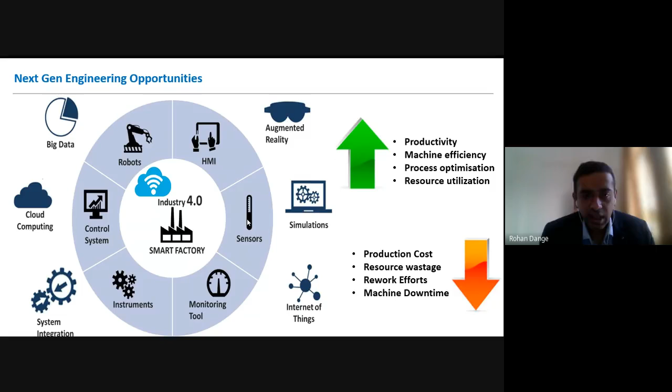Coming from the automotive background, or presently working in the automotive space, these are the key areas where we are seeing a lot of demand coming from research and development institutions, technology companies, OEMs, and other support tier ones, tier twos, and engineering companies. I'll do a deep dive in the subsequent slides, but at a high level, this includes vision-based terrain mapping systems and intelligent systems.

Telematics is nothing but connected car kind of solutions, digital simulations and research. So if you had to check the safety of a vehicle, no more do you require a physical vehicle to do all this testing. Everything has now shifted to digital simulations and research.

Big data and machine learning: a lot of data is being generated by vehicles now, and analysis of that big data would help in predictive maintenance. It's not that your machine would have a downtime and then you understand the fault. The intelligent systems would tell you in advance that in the next 50 or 60 kilometers there is a probability of some fault occurring in your car. That's how the systems have become very intelligent.

System engineering, system integration, validation, human machine interface, and electrification. Electric vehicles are going to be a big topic post-2025, and every country is now targeting shifting from fossil fuel powered vehicles to complete electrification. So electrification of vehicles is one of the upcoming areas in today's automotive world. If I had to bucket all these things into major trends, I'll say it's electrification, connectivity, and autonomous operation.

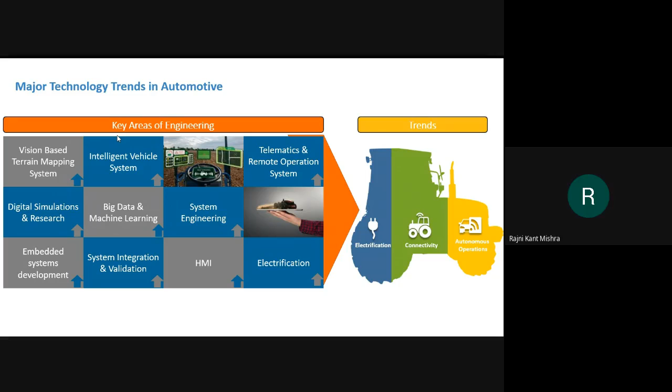If I talk of electric vehicles, it's a vast ocean, I'll say. But if we bucketize the major offerings from the electric vehicle domain, that would be the battery management system, which is the heart of any electric vehicle, charge control modules, supervisory control unit, electrical vehicle control module, motor control unit, DC to DC converters, onboard chargers, and range extenders.

So just to give a high level overview, range extenders are nothing but, if your vehicle is capable to run 300 kilometers on a single charge, every OEM is doing R&D on how to extend that range, say from 300 kilometers to 400 kilometers on a single charge. Onboard chargers.

Onboard chargers are nothing but, when the vehicle battery is down, how we are able to quickly charge the electrical system so that the vehicle is up and running.

DC to DC converters, because every subsystem device would run at different voltage in an electric vehicle. So those DC to DC converters would be required so as to suffice the need of each subsystem device for their voltage requirement.

Motor control unit. Electric vehicles, as you know, are completely motor driven units. So controlling that motor, acceleration, braking, all those functions are driven from the motor control unit. And this electrical vehicle control, supervisory control, charge control are nothing but the control systems which govern electric vehicles. These are the 6-7 major areas where engineers would be required for the design, development, validation of electric vehicles.

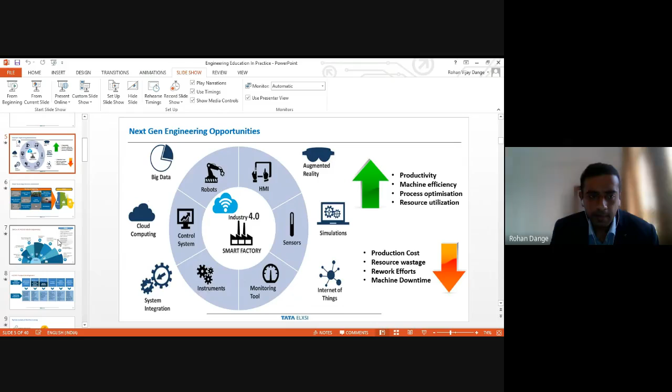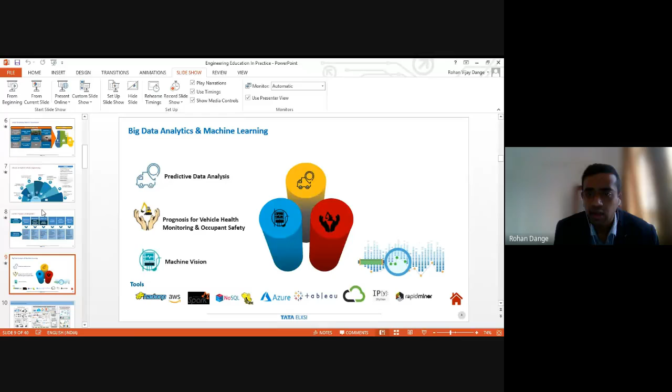Then we talked about the major technology trends in the automotive sector, then electric vehicles. We did a deep dive into what is meant by product development management. Then subsequently I talked about big data analytics and machine learning, and gave the use case of chiller application in Amul Dairy plant.

Then we touched upon the data analytics platform, right from how the data is collected to how the dashboards are used to interpret the data and take corrective action. We talked about smartphone applications, and how with technologies like Alexa, our homes are becoming smart.

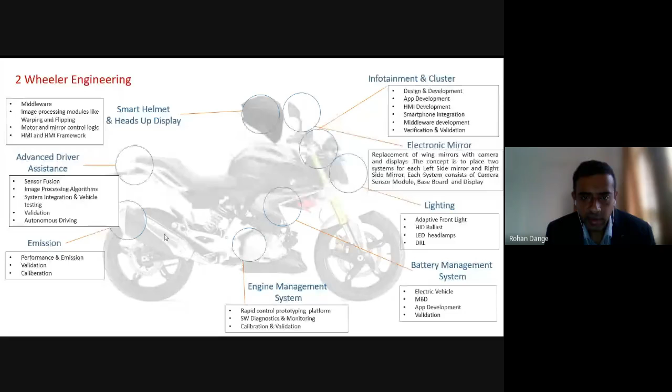In automotive engineering, there are 6 major areas where we see a lot of demand for engineering students - embedded software like control software development. Then AUTOSAR is a body which defines the automobile software, how the base platform should be, what should be the features and specifications of the automobile software. So AUTOSAR related consulting, then software testing.

These are interesting areas where there are opportunities. Then hardware - the electronics hardware that goes into the vehicles, the thermal analysis, the vehicle harness design. Vehicle harness design is nothing but the wiring harness, the electrical systems that are fitted into the vehicles, then the testing. These are the areas where there is a lot of requirement.

Then of course HMI - don't be surprised that your HMI is now Android based in the upcoming years. TV has become Android, mobile has become Android, your car systems have become Android, and it's just a matter of time when your two-wheelers would also be Android based.

So HMI design, that is human machine interface design development, and all those testing and validation in the software comes under HMI. And of course validation means on-vehicle testing, where you validate that whatever features you have developed are working as per expectations, with no bugs in those.

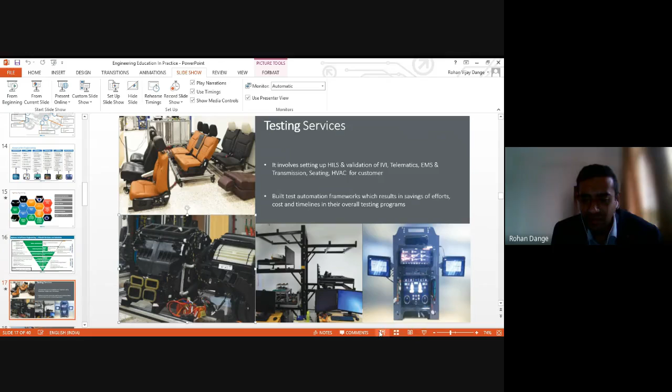Testing services - I'll tell you, even the seating systems in a car go through a lot of testing. Trust me, it's no longer the case that a car company orders a seat from a tier one company and it's just fitted into the car. No, before it goes into a car, a lot of testing happens even for seating systems in the lab.

You can appreciate the kind of testing setup that is there - very high level, sophisticated, with a lot of investment going into it. This is a very typical testing setup for testing the seating systems.

And trust me, all these testing engineers earn a good amount of money, and it is very interesting - what kind of vibrations, what kind of noise, whether if there's an accident these seats would ensure the safety of the passenger. Everything is simulated and tested in the lab environment, and only then are the seats allowed to go into the car.

And then there is a lot of software-based simulation that is done because testing in various actual scenarios means a lot of investment, and also a lot of time. So people have moved to software-based testing, wherein the software is able to simulate various environments and test the strength of the seats.

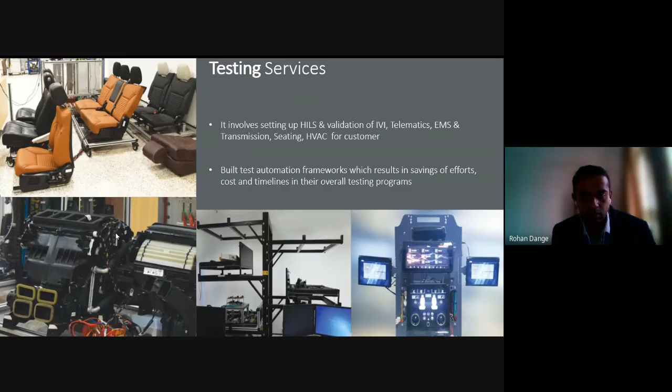One of the topics I want to touch upon is design engineering. Design engineering is whatever you see on your instrument cluster of a car, or your driver interacting with the infotainment system or information system of the car. There is a lot of design engineering that goes before such panels are fitted into the car.

If I had to list these down, there would be specific documents for the complete feature list - what kind of icons, what kind of features, whether Android based or Linux based, what would be the different icons, their colors, and the flow of icons. Everything is designed by the design engineer and documented before it's approved by the design head, and only post that does it go into the car.

So trust me, the infotainment system in a car or vehicle is something that brings the wow factor to the car. That is the whole reason there is a lot of engineering involved in that.

Then there's test strategy definition - what kind of testing should happen before this unit is fitted into the car. Because tomorrow I don't want that I want a GPS function in my vehicle, and instead of GPS it opens up some other app. Those glitches are not acceptable, because whatever goes into the car should be fully tested to ensure there are no glitches. So that test strategy definition is there.

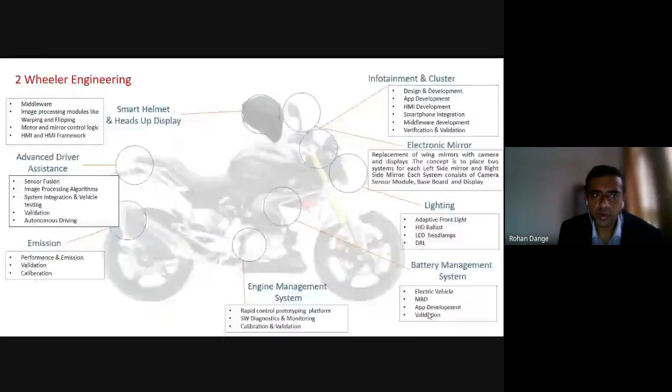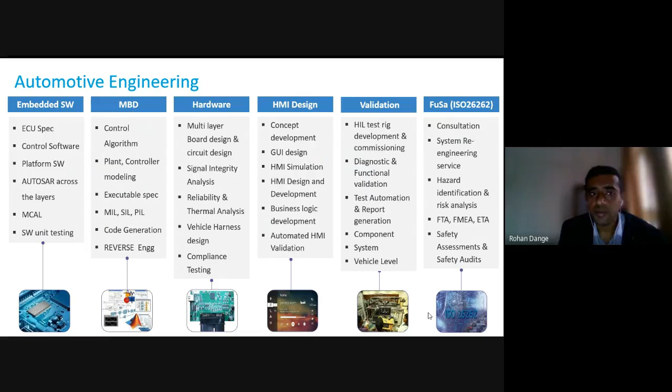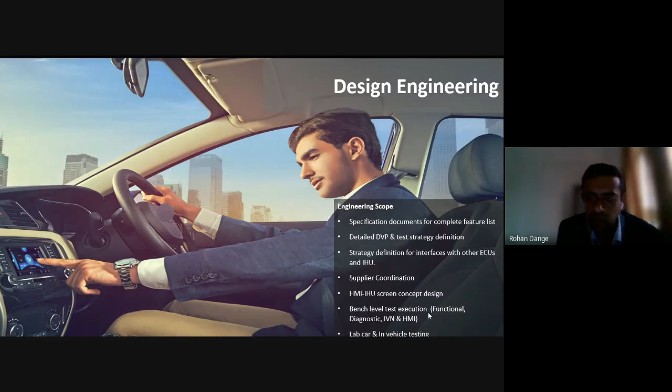So this was a typical overview. I'll just go into what we have covered till now. We just covered what goes into two-wheeler engineering. Then we touched upon the wider area of automotive engineering, what are the opportunities and what it really means. Then we touched upon lighting engineering, wherein I specifically talked about the BOM concept, that is bill of material. Then we talked about testing services for these systems, the opportunities in design engineering and what actually goes into design engineering. Then we talked about HMI and UX engineering, the opportunities and the things covered under design and development.

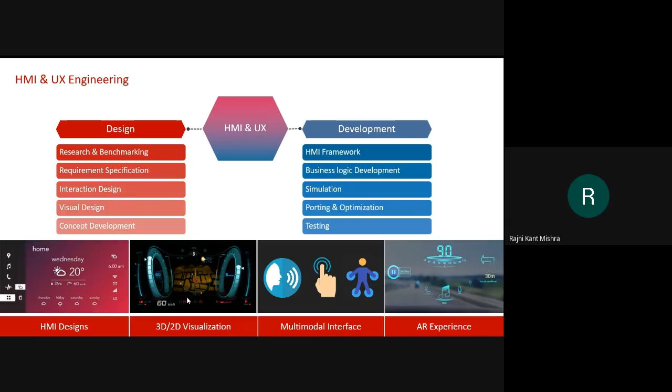Yeah, definitely, I completely agree with you that there is lack of awareness among people as to from where this knowledge can be acquired. So the answer would be that now with the likes of education companies like Coursera, and Khan Academy, these UX, UI design topics are available there. And even good engineering colleges like IIIT Bangalore, Indian Institute of Information Technology Bangalore, are offering courses in data analytics and UI UX engineering. With greater adoption of IT in the engineering field, these courses are no longer available only in certain sections of colleges. It is now very well available, and if students make use of these portals or platforms, they would be able to get theoretical training for sure in this domain.

So they should explore these platforms. Definitely they would be able to get good insights about these courses on these platforms.

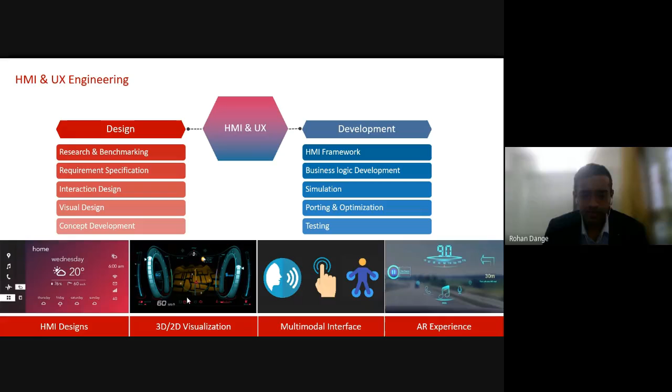Yeah. Thank you, sir. That answers my query.

Now, since my inclination is to make this session a little practical oriented, to discuss about the things on ground, I would like to now talk about certain case studies that I have come across in my career, and would like to tell how these different technologies we were able to implement in reality.

This is a very interesting case study that I have done in one of the companies who were manufacturing baggage handling systems. This work I have done during my PwC days. I was working in PricewaterhouseCoopers as a consultant for process optimization, and we got this requirement from a bag handling system manufacturer.

Due to the failure of baggage systems in airports, we were getting a lot of complaints from our end customers, which are the airport authorities who are our customers. So they said, please come, study our process, and suggest us a solution.

So the as-is process was that if a belt malfunctioned, it took some time to understand which belt had malfunctioned, and then for that service personnel to inform the maintenance team that the X belt on say one line had malfunctioned.

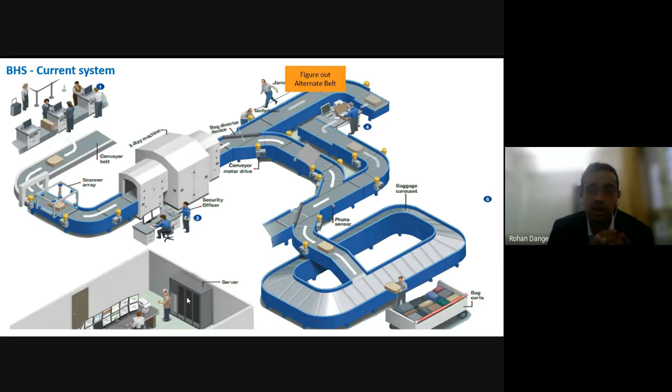Then the on-field ground staff would figure out the alternate belt because that belt is not working now. That would result in delayed schedules. The end customer would not get their bags on time, and if the customer is not getting their bag on time, they would create a halabula in the entire airport.

So for a baggage handling system company, giving the bag on time to the end customer is a very critical thing. Then not only that, it would lead to rapid baggage buildup if the system got stuck somewhere. So the result is an unhappy passenger, which is not good.

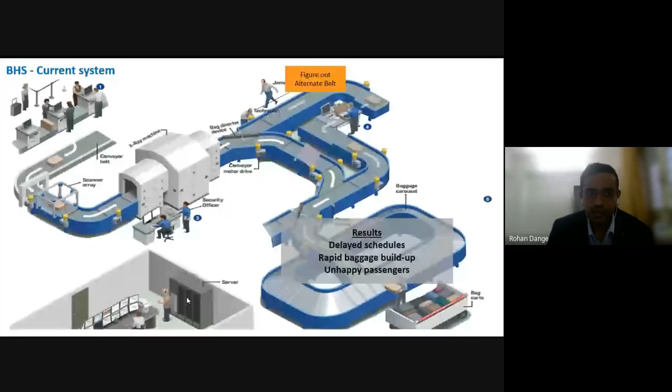So what we did was we tried to study the entire system, the IoT, and tried to see if we can implement IoT in the overall system.

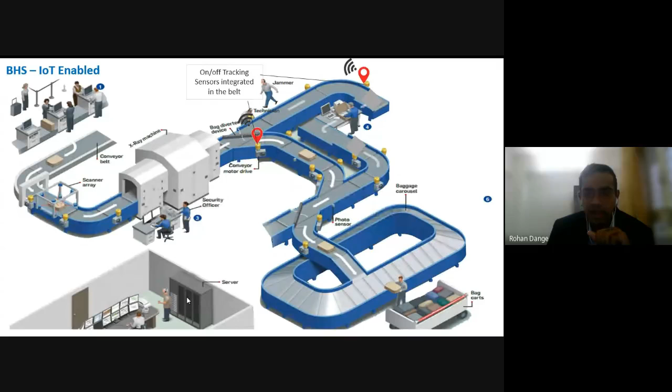So then we put IoT sensors in the entire system, which were integrated with the IT systems. And of course, there was a gateway which would send the data to the cloud, and from the cloud the data would come to the mobile application.

And we would know parameters like the name of the belt, where it is located, the status, whether it is running or idle. If a belt malfunctioned, the sensor would send an alert notification to the different stakeholders, which is the maintenance staff in this case.

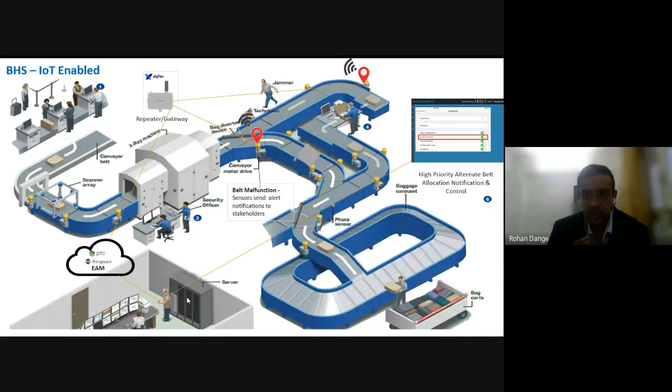Then the maintenance staff would get the exact details of which belt had malfunctioned, and they would take immediate corrective action. So the end result is zero schedule impact.

It will not lead to any pileup, because the moment the belt malfunctioned, the people are able to take corrective actions on ground, which will lead to a great passenger experience.

So in this way, we were able to give a great passenger experience by enabling IoT into the baggage handling system, and end customer complaints reduced, and the baggage handling system company was very happy, and then we got more orders from this company.

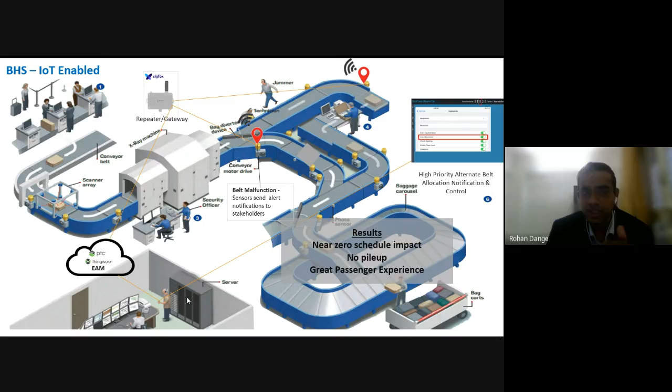So this is what consulting is. This is where you solve the end customer's problem by actually implementing the systems on ground. So I hope you were able to get the flavor of the power of IoT applications in day-to-day applications. This was the use case of predictive maintenance with IoT.

So in the backend, what actually happens is that before a belt malfunctions, the system is able to understand that with the parameters, maybe if a belt's bearings have reached a certain temperature, beyond 80 degrees Celsius, there are high chances that this belt will malfunction in another 80 or 90 hours of operation.

So that intelligence is there because of the IoT. They know the health pattern of the belt, whether it is good or poor health, by monitoring different parameters, and unusual patterns are already detected by the system. The corrective action is already in place. When they know that in the next 80 hours this belt is going to malfunction, they have already started working on that beforehand.

That is the outcome of this implementation. The maintenance staff gets the alert, and they manage to solve the problem before it percolates into the system. So it helps in preventive and proactive maintenance, it helps in process optimization, and process optimization leads to cost optimization, and the end result is a great passenger experience.

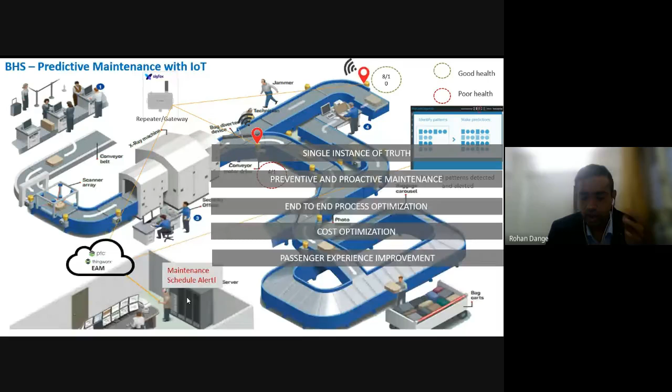So that was the case study for the baggage handling system. Then electric pad detection - this is another project that I have done.

One of the pain areas for electric vehicles is that during charging time, if my charging takes about 70-80 minutes, a driver will feel that he is wasting his time till the battery gets charged. So what we have done is an IoT implementation of the charging pad, wherein there is a seamless integration of charging status with the mobile.

So a vehicle goes into the charging station, and that charging station alignment we can see on the mobile app. So I know where I have to park my vehicle so that it gets charged, and the active status of my battery charging is live on my mobile.

So till the battery is charging, I can go to a nearby mall or food station, or go do some work. It is not really required that I stay near my car till the battery gets charged. I'm getting those signals wirelessly on my vehicle, because of which I can utilize my time better.

And also for alignment of my car over a charging pad, all that assistance is given through the mobile application. So this was another use case for electric pad detection. I told you the details of that application that might not have been in the scope, but the scope overall talks about alignment assistance with integration of the camera with the mobile.

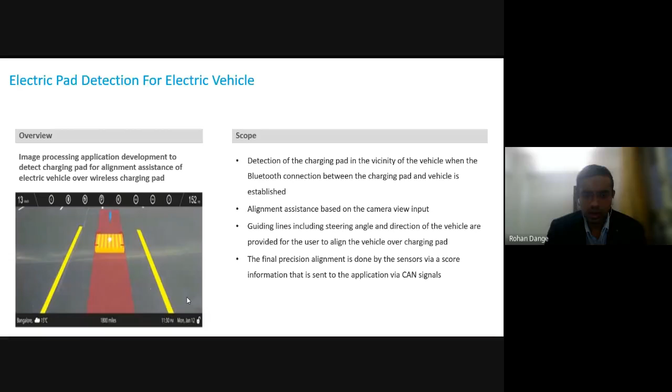Now, this is also another important case study I wanted to talk about. This was regarding a car manufacturing company, wherein we were helping them reduce downtime, because machine failure was causing the car company a lot of downtime.

Imagine when there's downtime in a car industry, they would not be able to meet their production target. Suppose their target is to manufacture 10 cars per day - if they can't, the vehicle wait time for the end customer would be more. And if I go to Tata Motors and they tell me the wait time is 3 months, it might influence my buying decision if I want my car immediately. So a high downtime in manufacturing would affect the buying decision of the end customer - the car industry cannot afford downtime in the manufacturing process.

So what we did was go to this car manufacturer and analyze different data. We collected data through sensors, and we found that our data collection and analysis would take at least a couple of weeks. So if a machine malfunctioned on day 7, to repair it would take another 14 days, because we have to collect all the data, understand the problem, then take corrective action.

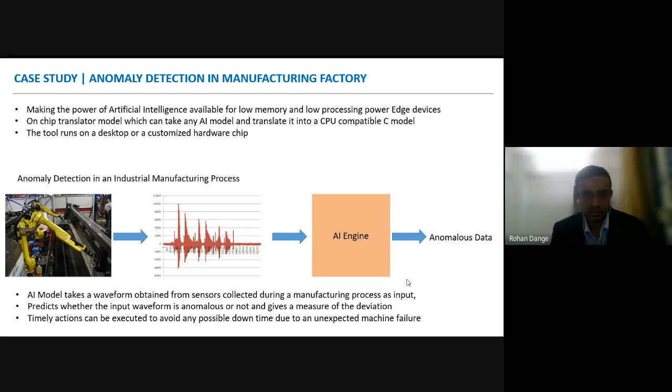A similar case study we did for one of the applications in the pump industry. So for a pump, the motor drives the pump.

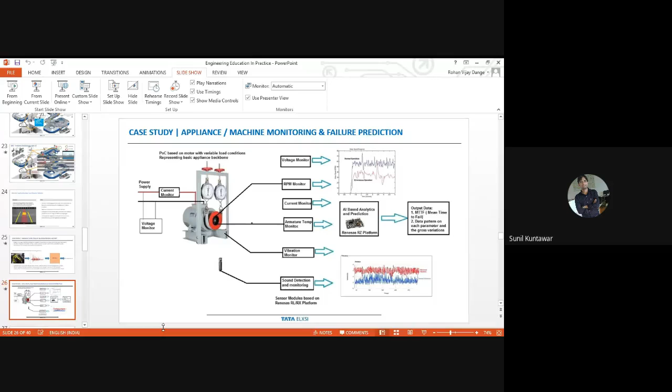Rohan, sorry to interrupt. This is Sunil, sir, the co-coordinator of this faculty development program. I want to ask one question based on artificial intelligence and machine learning. Sir, can you tell us what are the popular organizations that are providing training based on industrial projects, so that they can train the particular students? Can you tell us some organizations or institutes that will help our students for doing industrial based project training?

The likes of CDAC and I Square IT are there, two prominent institutions providing training in the AI and ML domain. Even platforms like Academy, as I've mentioned earlier, have tie-ups with foreign and India-based universities for courses in this domain, so those are also good platforms. But if you personally ask me, CDAC and I Square IT is something I would recommend to students. These are good programs - 1 year, 6 months, 3 months - so as per the convenience of the students, they can do these courses, and trust me, these are very useful programs.

Around 10 years back, PLC and SCADA programs were very relevant to the industry. I would say now PLC SCADA are still relevant, but if you add the flavor of AI and ML to PLC and SCADA, then trust me, sky is the limit for students to excel in these domains.

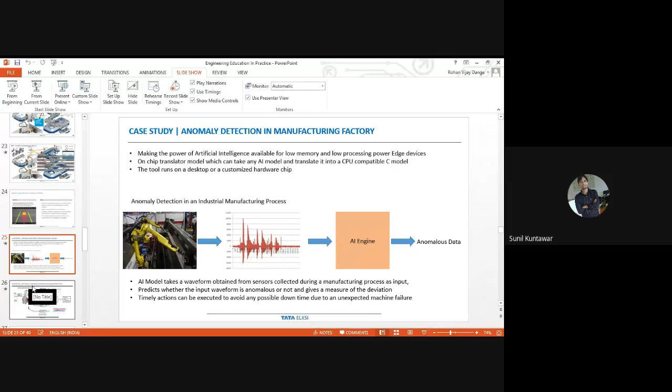Sir, one more question - computer science and electronics students are more aware of artificial intelligence and machine learning. My question is, if students are from electrical or mechanical engineering, can they do these particular courses? Definitely, these AI and ML courses are applicable to all, not only IT and computer science. In fact, AI and ML is more relevant for mechanical and electrical engineers because all these machineries in manufacturing, automobile, energy utilities, and oil and gas industries are electromechanical machines. So electrical and mechanical engineers are in a much better position to understand the functioning of these machines, and since they know the domain, they can actually apply AI ML in a much better way. So I'll say it's the other way around - electrical and mechanical engineers are much better equipped to implement these technologies on ground level.

So what happened - to develop these engines, these AI and ML systems, are IT and CSE engineers more capable? So understand, to develop the software which drives the AI and ML, IT and computer science people are well equipped. But to implement these technologies on ground, electrical, chemical and mechanical engineers are more equipped. So that is the difference between the two.

Embedded systems require both hardware and software in this domain, artificial intelligence.

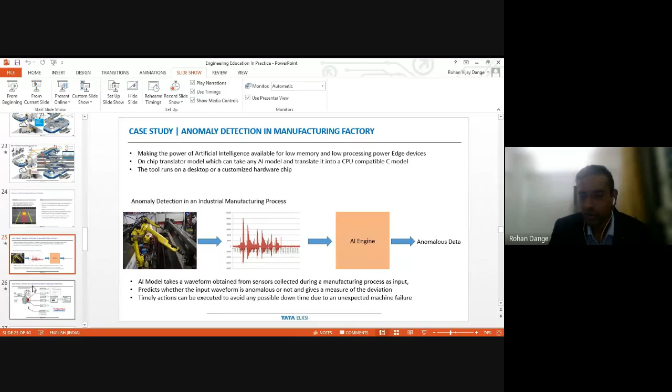Thank you so much, sir. Thank you, that was a very relevant discussion, and I'm happy to have such discussions in whatever time remains. I'd like to give an example.

I'll tell you another on-ground example, because I'm very interested to share the learnings I've gained. I was working with the Rajasthan Water Supply Corporation, which was supplying water to different villages. Water distribution is very critical in Rajasthan because of the situation there - water is not available 24/7.

Whatever time the water is available, people are just waiting for it to come. So water distribution is a very critical application. Since these pump sets and motor sets were installed 20 years back, they were very old, and there was a lot of failure in these pump sets.

People were not getting water every day because of the failure of the pump sets. So all these people went to the Gram Panchayat collector office and started pelting stones. The officer had a very hard time convincing them he wasn't getting approval to install new pump sets, because that would require a lot of investment and the government didn't have funds.

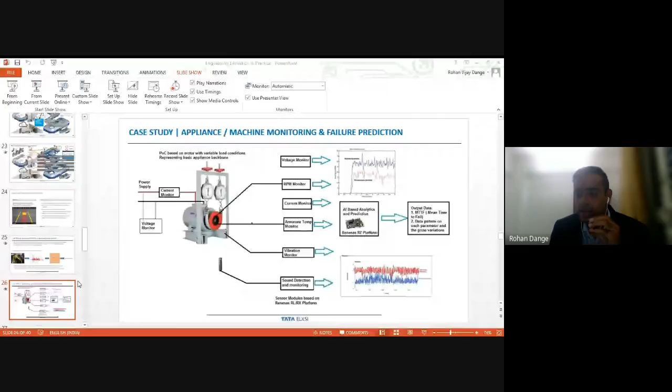So we implemented sensors, and all the sensor data was pushed to the cloud. From the cloud, sitting in PwC office in Gurgaon, I was able to get that data. That data was also fed to an AI-based analytics and prediction platform made by Renesas, which would tell us the mean time to fail - MTTF is a very important benchmark parameter.

So when I have a mean time to fail, I would know that this pump is going to fail in the next 80 hours. If it is going to fail in next 80 hours, then immediately I would call the pump operator who is sitting in Ajmer, and I will tell him that the temperature, the vibrations are beyond certain dB. So might be the case in the armature winding, there is some problem. So you immediately go to that remote place from Ajmer within say max 2 days, because if my machine is saying that it will fail in 80 hours, means within 4 days I have to take corrective action.

So I have to keep some buffer. I'll tell him that in the next 3 days, the problem should get solved. Otherwise, the villagers will start pelting stones at the Gram Panchayat officer. So if you don't want that to happen, please go and take corrective action.

So you understand the context, the power of IoT, the power of AI-based platforms. Sitting in the Gurgaon office, I was able to monitor and take corrective action on the pump sets, which were so remotely placed in some of the jungles in the Rajasthan region. So this is the power, and this is the end implementation of IoT. I hope with this case study you would appreciate how important IoT is for industrial applications and water supply distribution companies.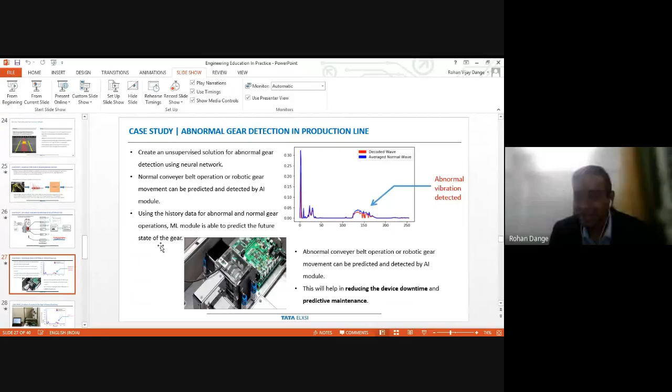Similarly, there are use cases for a gear manufacturing company, wherein we implemented this AI-based platform, which would analyze the data, and whenever there was abnormal vibration, we would understand that something would go wrong in the coming days. So we need to take predictive action, so there is zero downtime.

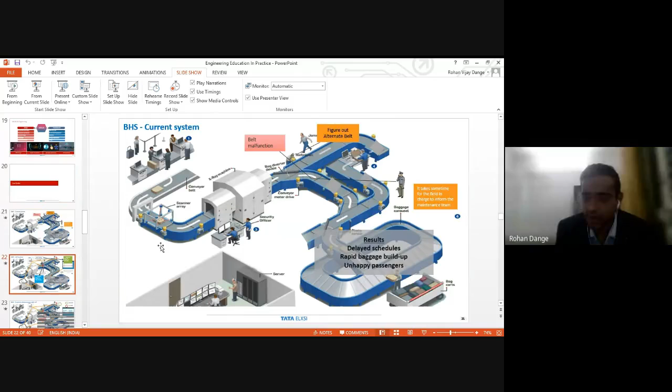So we come to the end of this case study session. I'd like to give a brief overview. We touched upon the use case that we implemented for a baggage handling system maker, how IoT is able to reduce the downtime and give the wow factor to the end customer. Then we talked about how the electric pad detection system with mobile integration is able to help the customer utilize his time when the battery is getting charged.

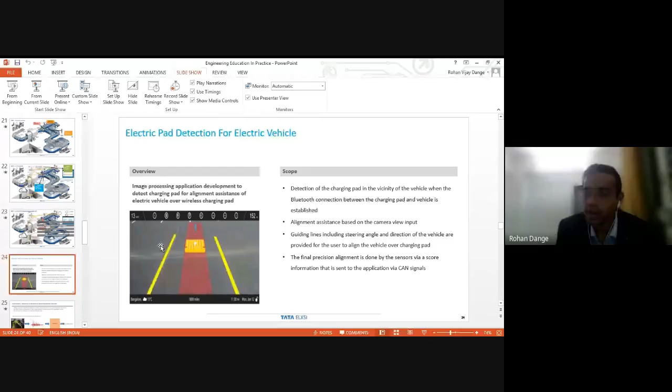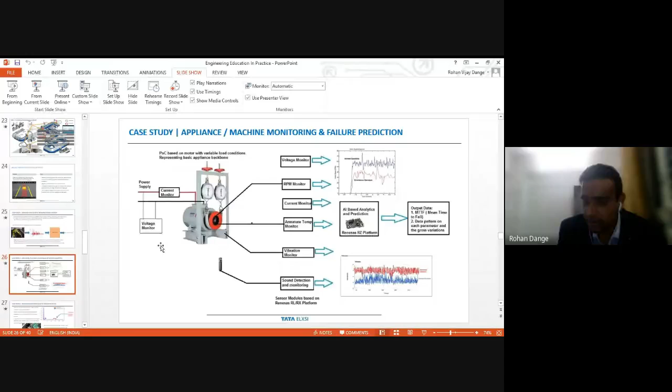And how the cameras on a car are able to help the driver align his car appropriately without any assistance. Then we talked about anomaly detection in a car manufacturing company, how the AI engine is helping there. Then, which was a very good case study, we talked about a live example of machine monitoring and failure prediction for a pump distribution company based out of Rajasthan. Then we talked about similar applications in a gear manufacturing company and other industrial applications.

So with this, we complete three out of four quarters of this presentation. And again, I would like to open the forum for any technical queries. And after that, we will go to the last section, which talks about the key engineering areas in the upcoming years. So I'd like to take any questions.

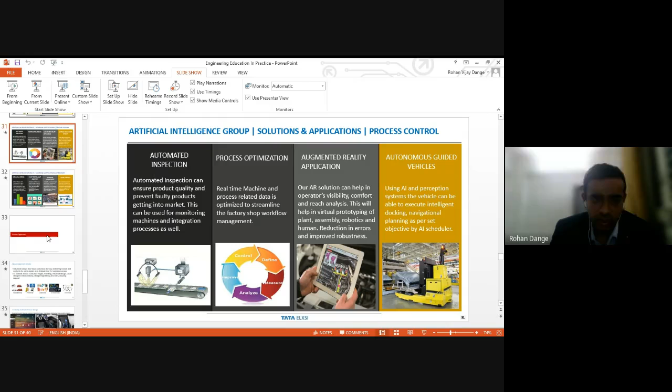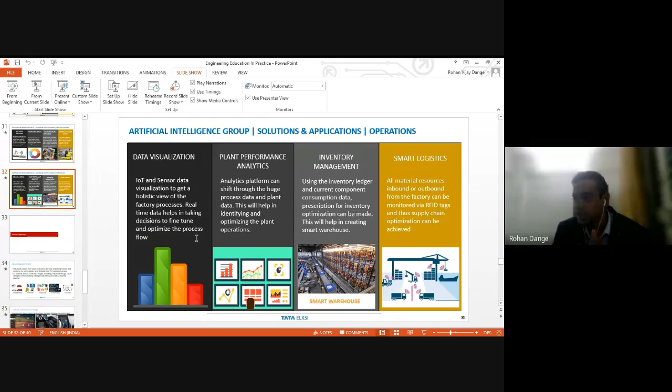Smart logistics is also happening in Amazon, using smart RFID tags where different nodes communicate with each other without human interface. Imagine I have to dispatch from my stock to a ship - there's connectivity between the two. My autonomous vehicle knows that the ship is arriving at the dockyard around 6 p.m., so it's smart enough to collect all shipments by around 5:30. It knows that going from the stockyard to where the ship collects the parcel takes about half an hour, so it needs to leave by 5:30, and it does. With Google Maps integration, it knows that with traffic it will be 5 minutes late, so it intelligently messages the ship that it'll be 5 minutes late. So the ship doesn't leave exactly at 6 p.m. but waits 5 minutes for the other goods to arrive. This happens seamlessly because of the technology - there's no human interface in this communication. That is smart logistics, and it's actually happening in companies like FedEx and DHL in their European counterpart organizations. Soon it will be a reality in India - I have absolutely no doubts about it.

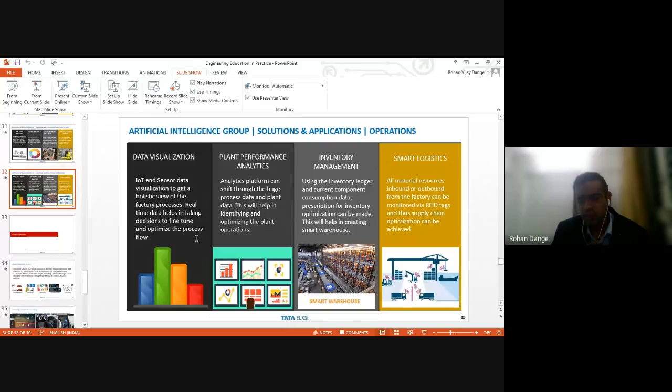So this was more about the key engineering areas wherein we talked about the artificial intelligence applications in device management, in process control, in operations. Now I have around 12 minutes, so in that I would like to touch on the point of creative engineering.

Creative engineering is also equally important, because the design of your car, the design of your product in sync with the customer requirement is equally important. Today cars don't sell because they have good horsepower. They don't sell because their engine sound is good, or because they are smooth. I'll say it is a factor, but they don't only sell because their mileage is good.

Nowadays the car sells because their HMIs are very upgraded. Their designs are very futuristic, they look very unique. There's a lot of customer study that has been done, and the features are in sync with the customer expectations. So all these things come under industrial design, wherein industrial design really helps customers.

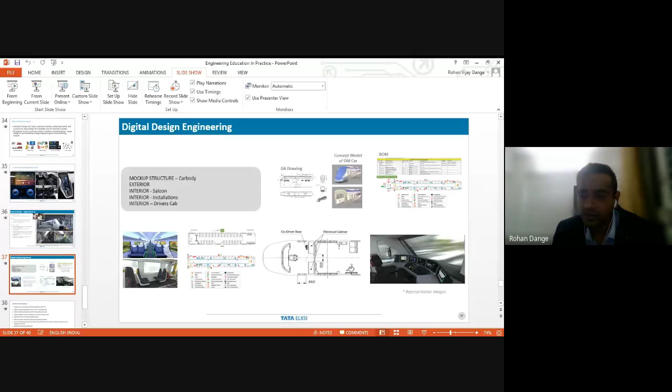There is a lot more to explore in the engineering domain beyond the IT world. What is really expected from an engineering program is that they are able to apply their knowledge on ground. If they are not able to do that, I don't think they have gained from their engineering program. They should have analytical capabilities, the capability to analyze, interpret, and make sense of data, because data scientist is one of the upcoming areas with a lot of demand.

Communication is a very important aspect of an engineer. Trust me, if communication is good, and if they are able to speak their domain language and communicate effectively, then they are much more employable, because the communication angle is missing in today's engineers. There is absolutely no doubt about it.

Then they should engage in lifelong learning. They should have the attitude that I'm learning to upgrade myself, not just learning to get a job. Getting a job is understood, but that attitude should be there to gain knowledge, not just studying and scoring marks to get into a job. Such people don't end up progressing far in their career if they don't have that attitude of lifelong learning.